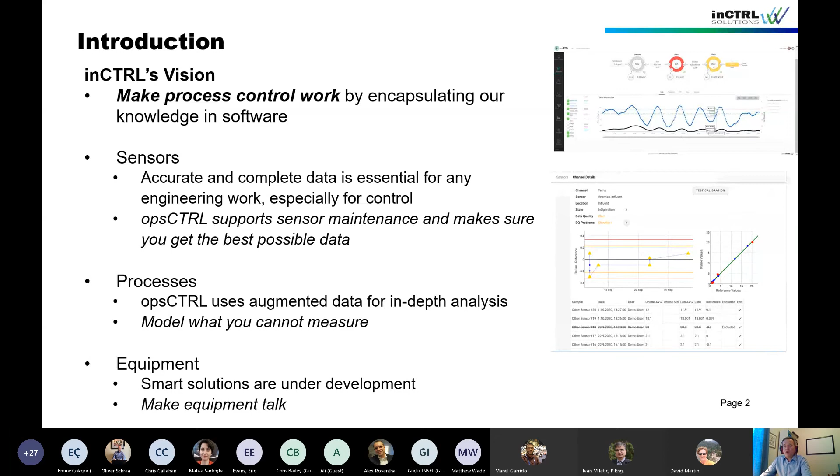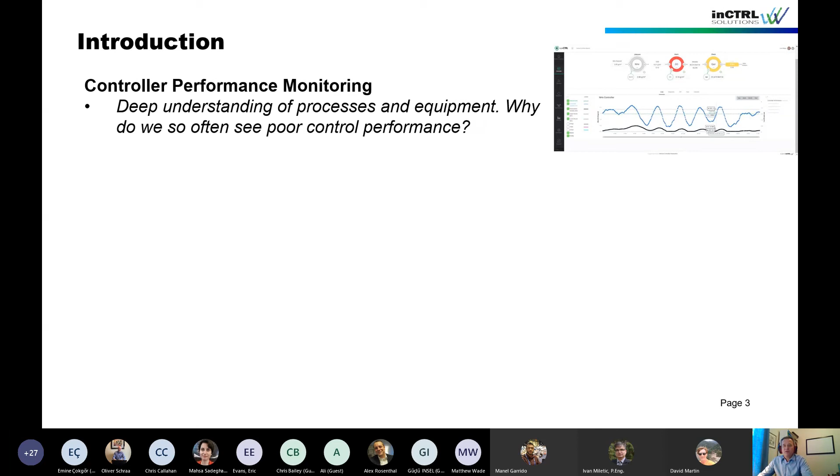Okay, so let's look into controller performance monitoring. I would say in our industry, we have quite a deep understanding of all the involved processes and equipment. We have experts: mechanical engineers, process engineers, instrumentation experts, of course, control engineers, and so on. We have a good understanding, but still we so often see that we end up with poor control performance. So why is that?

A lot of people now talk about artificial intelligence, machine learning, model-based predictive control and so on. And we love that stuff. Not that we are against it, but in a couple of projects I looked into with artificial intelligence, there was one study saying we should set blowers on timers. That's going back into the 60s. That's not improving, that is just creating a mess. The AI or machine learning, whatever they used, realized there is a very regular pattern and said, well, then we put it on a timer. Really bad solution, and nobody in the right state of mind would recommend that. But that filter doesn't exist for AI.

Feed-forward control, again, there will be solutions where that makes sense, but understand your equipment and your process. For example, if a valve is already open, there is no controller in the world able to provide more air, at least not for that specific control. If the valve is open, it's open. That's an equipment limitation. Same with DO: if DO is already at 2 milligrams per liter, then more air is not helping. You have to understand the limitations of process and equipment to make it work.

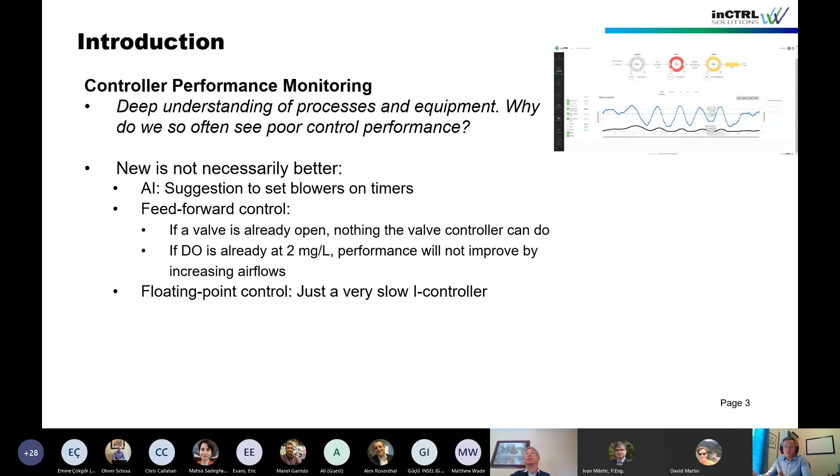Sometimes you hear new control formulations like floating point, and that's just a very slow integral controller. That's nothing new and would not perform better than a classic PI controller. That means you have to understand the equipment, mechanical engineering, you have to understand the process, process engineers, and you have to understand the logic, so control engineers need to be involved as well.

Okay, so how to make it work, right? So what we try to do is really understanding what is limiting the performance. And we do that by providing understandable metrics, so that all the experts involved can understand that. Very important is visualization. If you cannot visualize that, you are not able to bring it down to the essentials. And it's very, very important to make sure that you get that message out and that you have something you can discuss with the other experts.

So at the very end, you pick the right control solution. And again, we love all the data-driven modeling. There is not a single project we do without some level of data-driven modeling, not a single project. So we do that all the time. We combine mechanistic and data-driven models and just make sure we find the best solution for our clients. So my message here is let's be smart ourselves and do proper engineering work.

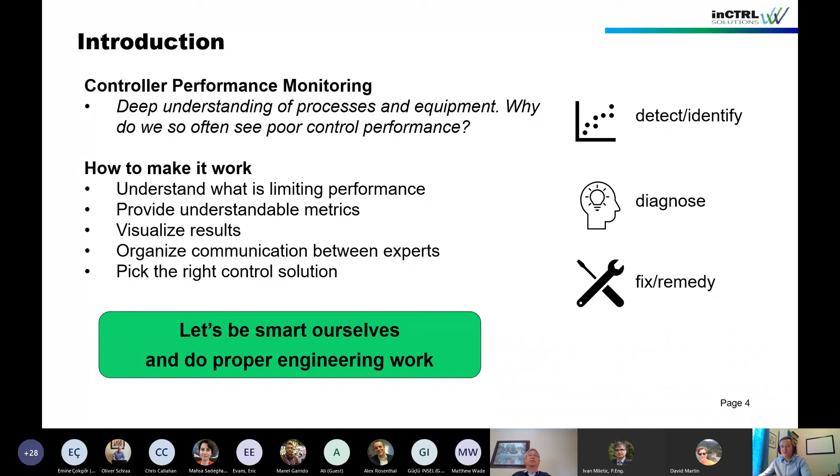The main thing that we're going to talk about today is how to assess the performance of controllers in the context of wastewater treatment plants. And we're going to show you some work that we've done over the last while to develop these techniques and to bring them to a useful state in the form of some software that we've developed.

So what we have here is basically a screen capture from our opsCTRL software platform, and we're hoping that you realize that all of the techniques and the topics and the algorithms and the methodology and the workflows that we're going to discuss in these slides, including the examples, are already developed and they're encapsulated in this software. So this is available for people to use for practical application in a wastewater plant.

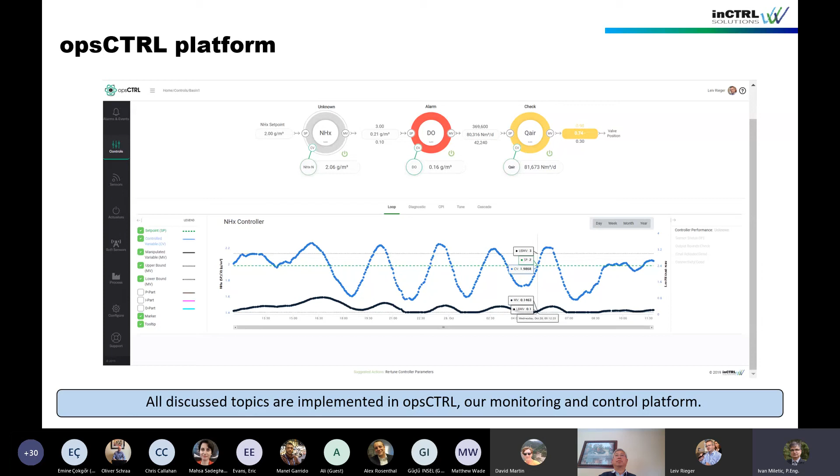So the outline of the presentation is basically a brief introduction on how you can first detect, and then diagnose problems in control loops. And the focus here is on controllers. But as Leiv was saying, you should also keep in mind that sensors also need maintenance, and that this is a topic deep enough on its own that we want to keep that as a separate seminar, but we do include this as part of our assessment, because sensors certainly are part of control loops.

So we're going to show you some examples on control performance monitoring, and especially the diagnostics piece of this. It's one thing to be able to detect the problem and identify that a problem exists, but it's another thing to be able to understand how to fix the problem. And then we're going to open the seminar for discussions and questions, so you guys can provide us some feedback on all of this.

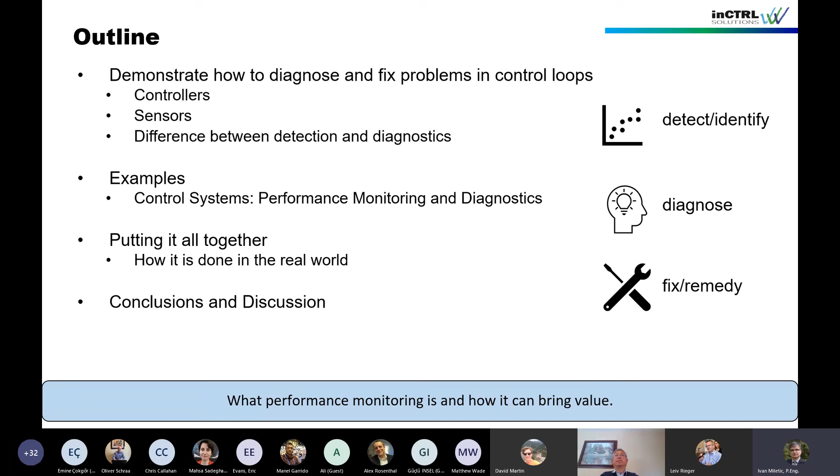All right, so control system fault detection. Realize that the slides that I'm going to show in this section apply for general fault detection methodologies. But in the case of a control loop, you're looking at these basic components. You're looking at the process itself, which is basically the plant where the controller is installed, and that, in my mind, includes the equipment that the biochemical process is evolving in, and it includes sensors that measure certain variables on the process, and then various control algorithms.

In this case, we're focusing on a PID algorithm in this presentation, the proportional integral derivative controller. So these algorithms typically compare the measured value that comes from a sensor, the algorithm is then applied, and a manipulated variable of some kind, a control action, is calculated and then applied either at a final control element or in a control cascade to affect a change in the process. And this continues on over time, and it acts repeatedly as new data are made available.

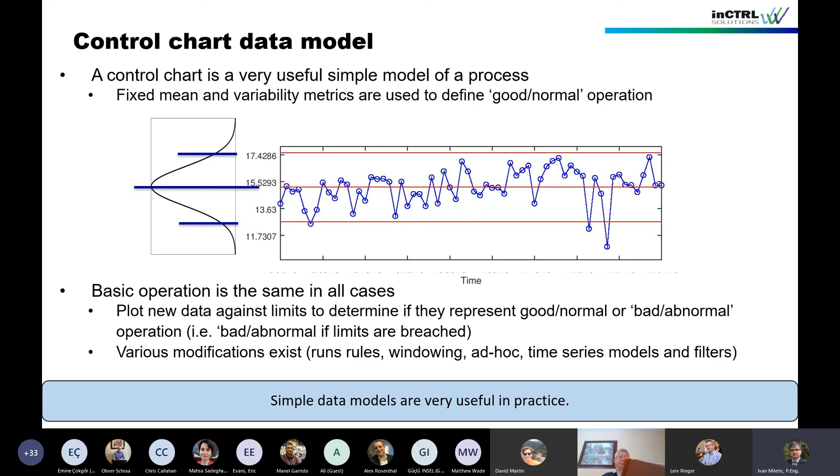So one of the messages that we want to get across with these slides is that the workflows that are needed to support this, especially for non-expert users, can be quite complicated. And it's quite the trick to get them simple enough that pretty much anybody can use them, but also to make them comprehensive enough in terms of scope and what they can do with the mathematical models being used, that they're very sensitive to faults.

All right, so what we're looking for here then is to provide workflows to support control system performance monitoring, also for sensor data quality and for any other process quality assessments. There's a whole long list of items you can put underneath these workflows, but the ones we're focusing on here are for control performance monitoring, and you're going to see what some of these look like in a few slides.

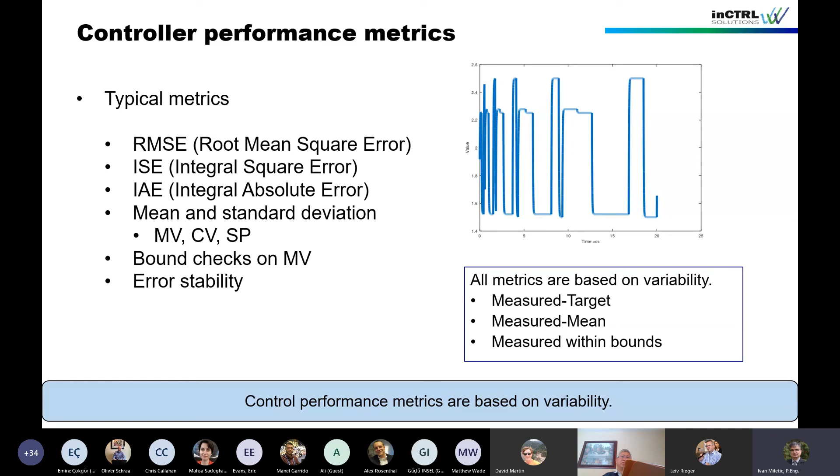If the data are showing an indication that the controller is sitting on bounds, then it becomes a question of how well you can evaluate the performance of this algorithm, because the algorithm really can't do much with the controller stuck on a bound. Okay, so these are the kinds of things that we're looking at.

Now, in addition to that, the idea of the quality of the data. So realize that the algorithm requires a fair bit of data, and the data that we're focusing on here is closed loop data that we get from a typical database. So we're not talking about some kind of a plant trial or any kind of fancy tests that we have to do in a plant.

We're doing this based on data that we can get from a typical control system of the kind that you can find pretty much in any plant. Okay, and this is on existing data that are normally logged. So what we want to do then is check the data length to make sure we have a sufficient number of data points to provide the information that we're after.

Make sure that outliers and missing values and these sorts of things are taken care of in the data set. And then we look at bound violations and consider how often the manipulated variable is sitting on its bounds. And then we look at any sort of statistical variations and how often the set points and the controlled variables are actually allowed to move.

And the reason for this is that allowing these variables to move in the plant is actually the richest source of information that we have for these systems. So we have to go through the data set, prune the data set, and then provide an assessment of performance by looking at these various features. And realize that this is being done automatically with no human interactions whatsoever through various algorithms that we have to do the data preparation for the performance assessment.

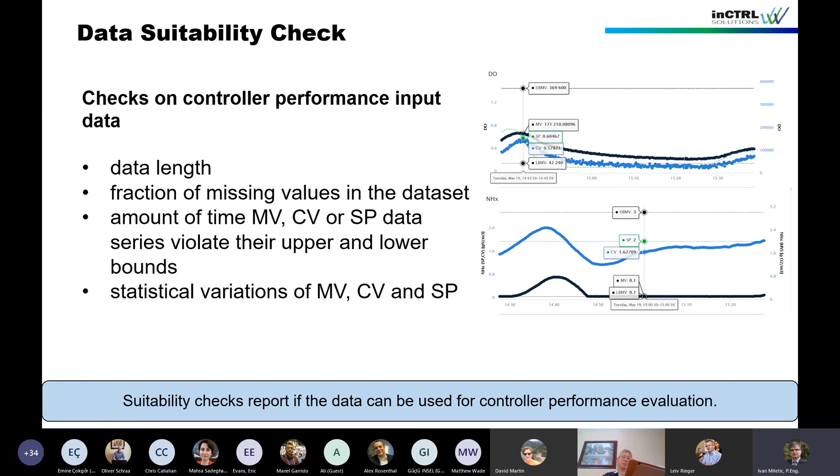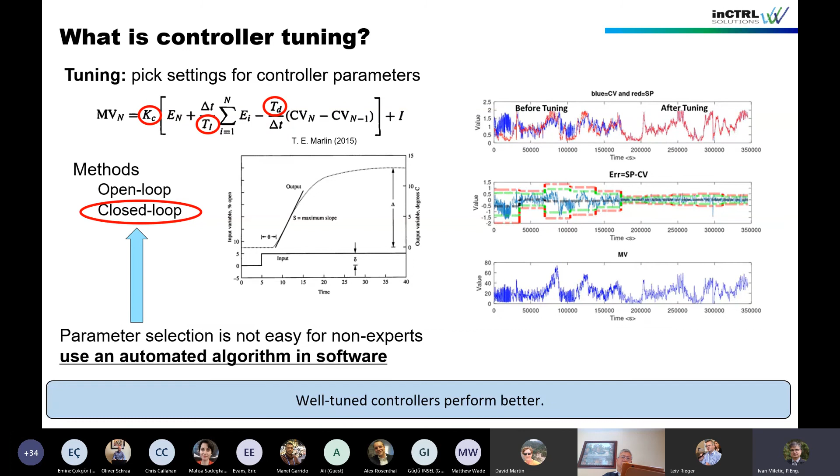And what you also see is that the error, basically the difference between the set point and the controlled variable, is drastically reduced. So that's what we're after. That's the goal of these tuning exercises that these software algorithms provide. But realize that the main idea here is that these are done in an automated fashion without any expert knowledge. So the data are assessed, and then tuning suggestions are provided for the user that can provide this kind of change in control performance.

So our preferred tuning method is the application of an automated tuning framework. Basically, the steps are that we fit a small model of the plant. This is a data-driven model, and then we apply the model in very quick simulations. By quick, I mean it takes a few seconds. These simulations can be used to establish how a PID controller could perform in the situation where it's installed, and we use that as the benchmark.

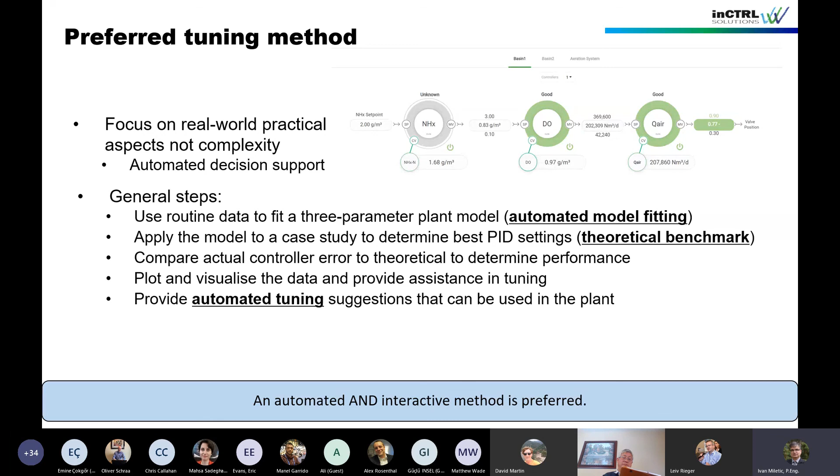So we compare the performance of the controller that's actually in the plant to the one that we simulate with our tuning suggestions, and then we offer the user of the software an idea of how they can achieve that performance by adjusting the tuning in their plant to meet this benchmark. And this is done in an automated fashion, like I said. So how is this done? Here's a little bit more detail.

Remember, the goal here is to set those KC, tau I, tau D parameters, one for each term in the PID controller, so that the controller can better track the set point. We're targeting PID controller performance here, but this can be done for various controller forms. We fit a plant model, a first order plus dead time model, using a data-driven impulse response methodology. Then we apply the simulation, generate estimated tuning parameters based on that simulation, and allow the user to apply them in the plant with two-way communication with our software.

Okay, so the main thing here is that the assessment of the performance is done, including a look at how well the data themselves are performing, if the data have enough information in them, and then the algorithms provide suggestions on the tuning parameters, or they give an indication that there's something wrong in addition to the controller. For example, maybe bounds need to be checked and assessed so that the controller actually has room to move.

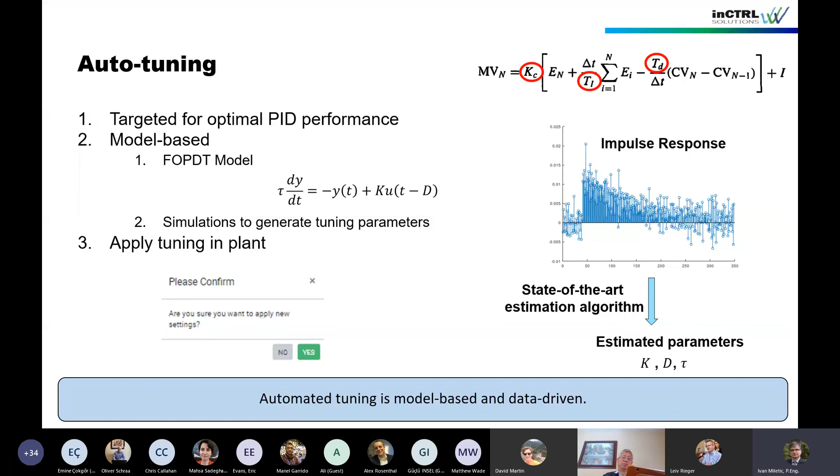Okay, so I guess now we're going to turn this over to Mahsa, and she's going to discuss some examples of how these techniques can be applied in various scenarios, starting with the controllers on for a full-scale wastewater treatment plant in Europe. Okay, thank you.

So can you see my screen? Yeah, we can, I think.

Okay, so I'm going to show you here some examples that demonstrate the capability of our software opsCTRL in finding the source of the problem of a feedback loop that is performing poorly, and the ability of our software in suggesting some solutions to solve these types of problems that happen in feedback control loops.

So the first example is an example where the problem, or what is limiting the performance of the feedback loop, is not the tuning of the controller, and the reason is some equipment and process limitations that prevent the controller from tracking the set point closely.

This is a screen of the interface of OpsControl software. So the control loop that we are looking at is a mixed liquor recycle controller. This is a full-scale plant. So we installed our software for this plant. Our software is receiving the data online in real time, and we are storing the data in the database. So we are able to analyze or evaluate the data to evaluate the feedback loop. So this is one of the loops for that full-scale plant.

One of the features of the software is that it shows the values in real time, which means that the control variable, manipulated variable, and the set point variable values are updating over time. So in the control loop that you can see here, those values with the units of gram per cubic meter will be updated over time and regularly.

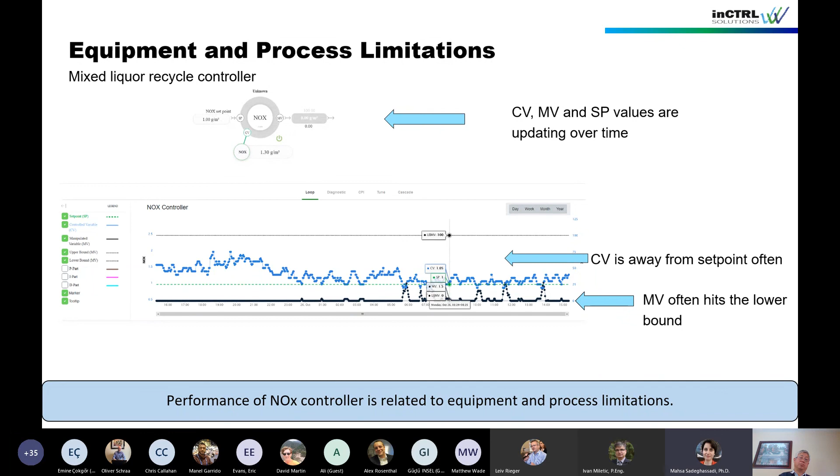So what the diagnostic check suggests is that we need to look at the MV, and those diagnostic check bars show that we are hitting the lower bounds for that manipulated variable, and that is what is limiting the performance of our loop. The next thing is that there is insufficient information on the set point, which means that there is not enough variation.

Now, all of these checks together suggest that it's not a good idea to change the tuning of the controller as the first step, and it's better to look at the source of the problem and then try to solve it that way. So the source of the problem here is the manipulated variable hitting the bound. So in that case, even the best tuned controller cannot help us to improve the performance of the closed loop.

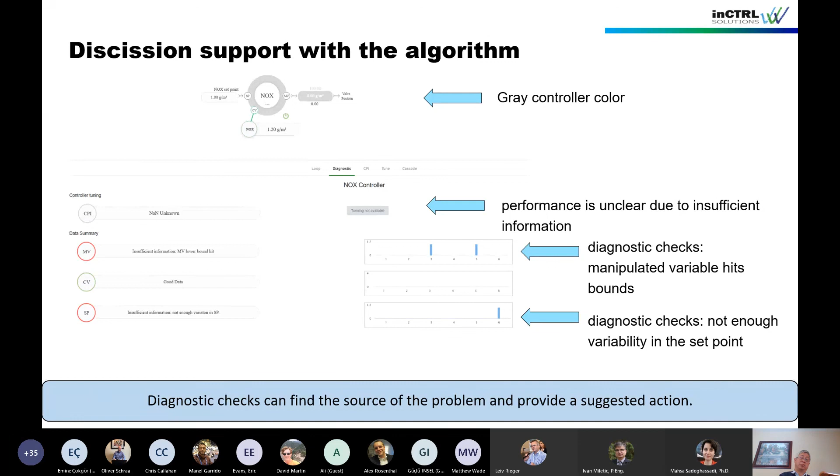Another example is one that shows that retuning the controller actually can help to improve the performance of the closed loop, and our software, opsCTRL, is able to suggest the appropriate tuning for the controller in an online automated way.

Yeah. So this example is actually implemented in the Simba environment. Actually, the SIMBA# environment is a very good place for us, at least for testing our opsCTRL software, because we are able to implement different models there with different levels of difficulty or complexity, and test how well our software can work when it faces different types

of problems. Yeah, the example here actually has two basins and one aeration system. So both basins are in a cascade framework and have three control loops. The first one is ammonia, the middle control loop is dissolved oxygen, and the last one is the air, Q air. The aeration system has a most open valve, which is followed by a pressure controller.

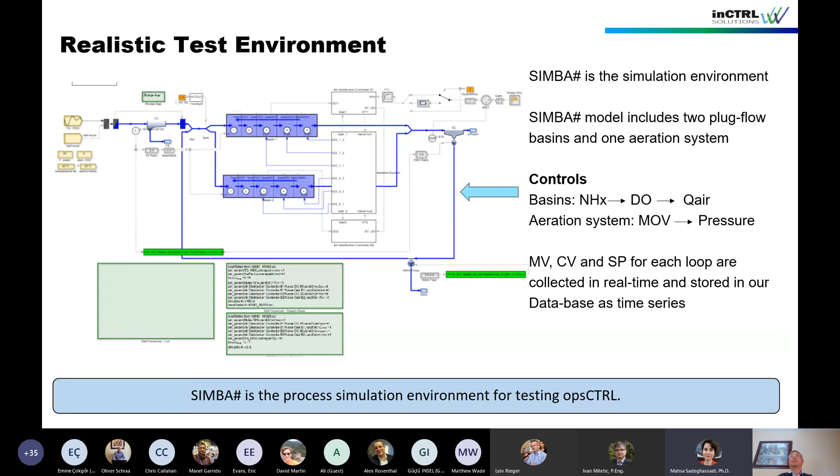So as I mentioned, here again MV, CV, and SP values are collected in real time, and they are stored in our database as time series. So in this case, we need to analyze the whole cascade together. Our strategy to analyze the cascade is that initially we will look at the control loop that is further down into the cascade, and then we will move to the controllers that are in other loops.

So here, the inner controller is actually the Q air, but when we look at it, we can see that it's not in an alarming condition, so we do not need to retune that controller. The next one is the dissolved oxygen one, which is in alarming condition. It's also shown by the red color. That red color in our software shows that the control loop is in alarming condition and something has to be done to solve that problem.

When we look at the diagnostic checks, we can see that MV, CV, and set points are all in good condition, so all of them seem to be okay. So then we need to look at the metric. The CPI here is the metric. It runs in real time and compares the performance of the current controller to a well-tuned controller, which is our benchmark.

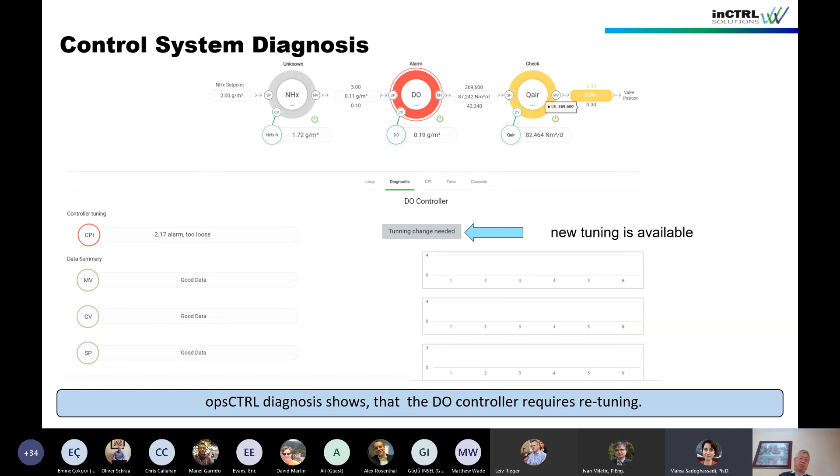The user has the ability to push the apply new settings button. When the user pushes that button, the new settings will be sent to the DCS system, and the plant will be running with the new controller parameters. And if the user has some expert knowledge and wants to play around with the values, they can make it a little more aggressive or a little more loose, see the results, confirm them, and send them to the DCS system.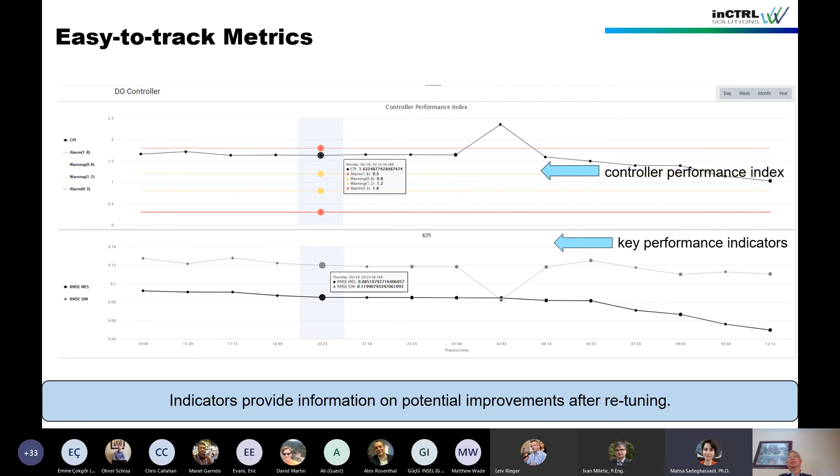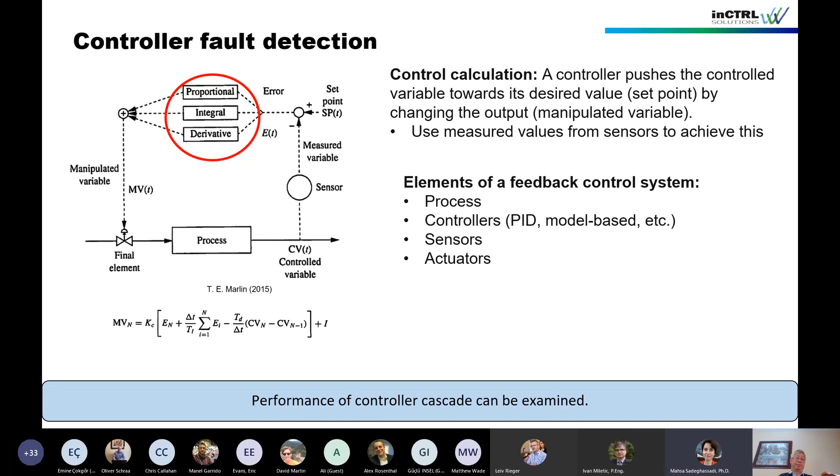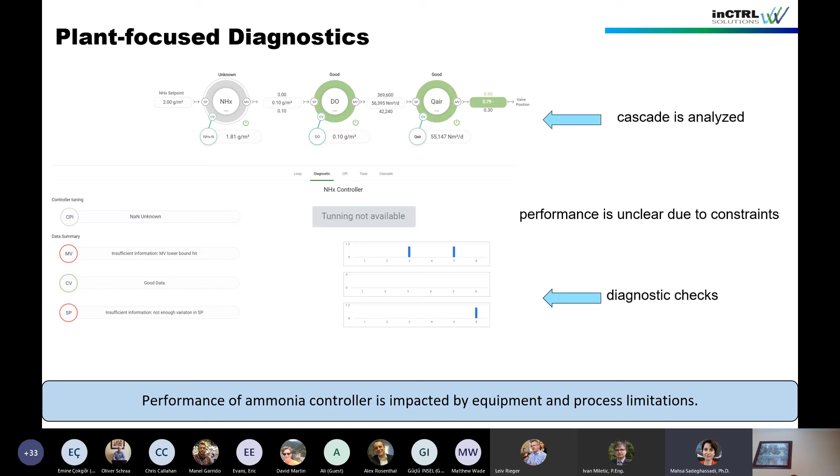Yeah, the conclusion here is that we should always look at the controllers together with other constraints or limitations that may affect the performance of our loop. So it's not a good idea to start changing or adjusting the controller parameters as soon as we realize that something is wrong with the performance of the control loop. We should always look at it together with other constraints or other things that may limit our performance, and then try to find out the source of the problem, and then take an appropriate action according to the source of the problem.

And also our control software is actually able to give us some suggestions in that regard, and tell us what's actually wrong with that loop, and can tell us if retuning the controller is a good option for that control loop, or it isn't worth changing the tuning of the controller. And if the problem is coming from tuning, our software is able to do the retuning in an online automated way to improve the performance.

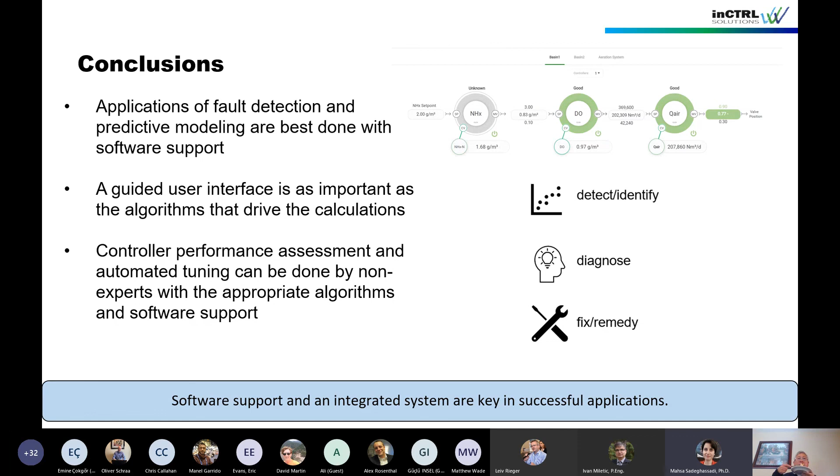Yeah. Thanks, Mahsa. Great presentation. So there we already have a couple of questions. So there were